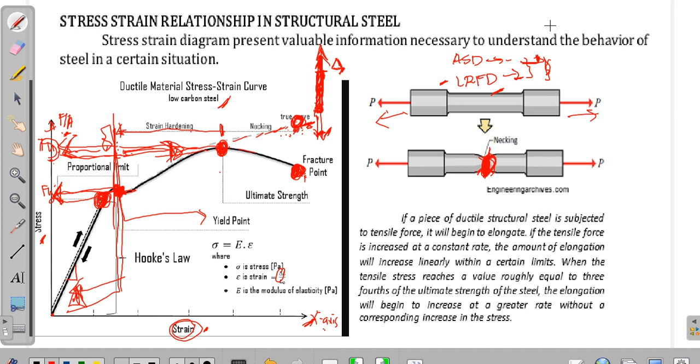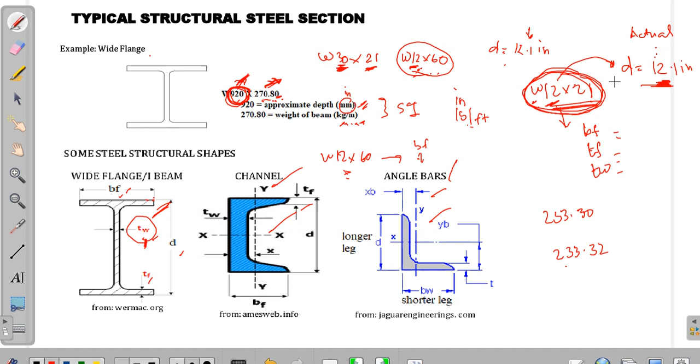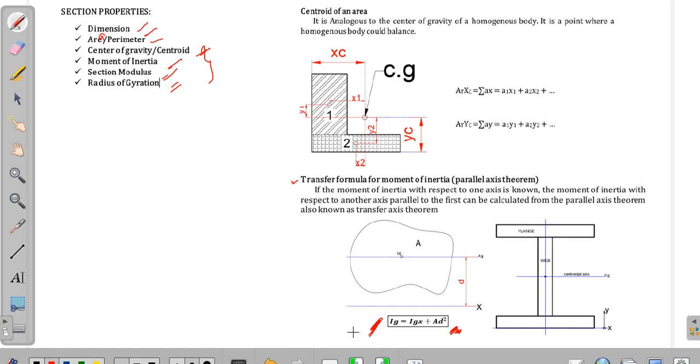Ito yung transfer formula natin, gagamitin natin yan to transfer yung ating centroid, especially if we have a build-up section. O moment of inertia, and radius of gyration, polar moment of inertia. At ang mga importante ito na properties ng steel, since gagamitin natin yan in the analysis later on for the steel section. So I hope that you have read the given properties ng steel doon sa module ninyo. I also have attached yung mga formulas.

So kindly memorize them. Yung radius of gyration, that is the square root of Ix over A. So memorize din nyo yan by heart, since palagi nyong gagamitin yan yung mga properties ng steel. So dapat alam nyo ito. Memorize the formulas by heart. Hindi dapat nakakalimutan ito, kasi this is the basic formulas ng design and the analysis. Palagi nyo itong gagamitin.

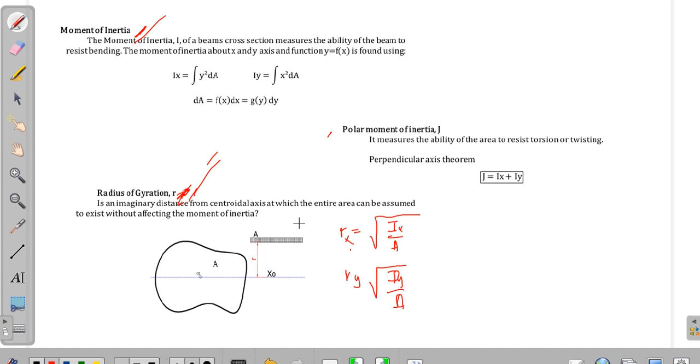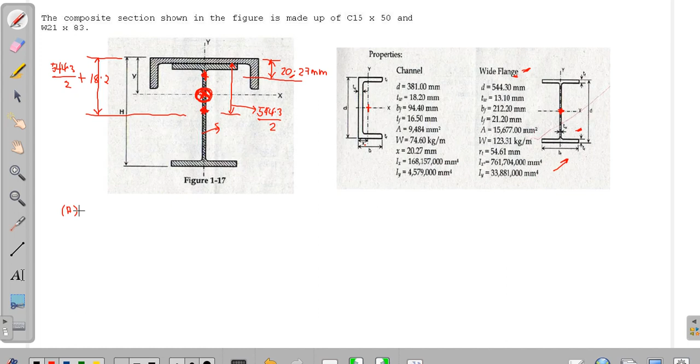To solve for the properties of the steel section, we need to start with the total area of the build-up section. This is a combination of the channel and the wide flange, with given properties for both. So the total area is simply the area of the wide flange plus the area of the channel section.

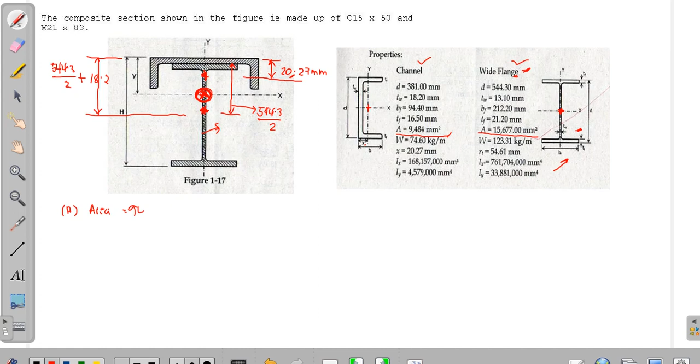We have 9484 as the area of the channel, and the area of the wide flange is 15,677. So the resulting value is 25,161 mm squared. That will be the total area of the whole build-up section.

So, next is to solve for the centroid, the location of the centroid, yung X bar and yung Y bar natin. Okay? So, as you can see in our build-up section, the centroid of the channel and the wide flange coincides along dito sa ating vertical axis. So pag tinitignan natin ito ang diagram natin, andito yung centroid ng channel, andito yung centroid ng wide flange. This coincides dito sa ating vertical axis. So in short, our build-up section is symmetrical about y-axis.

Okay? So with that, we could assume na yung global y-axis, yung centroid natin, will be aligned with this y-axis. So ano yung magiging value ng x bar natin? So yung x bar natin is equal to 0 because our centroid is symmetry about y-axis.

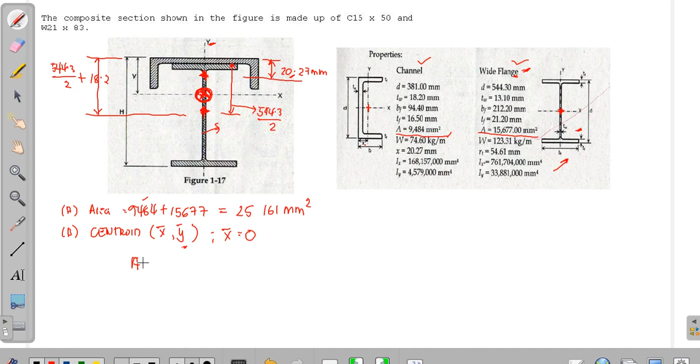So, yung isosolve na lang natin dito is yung ating value for the y bar. Okay, so to solve for the value of y bar, gagamitin natin yung Varignon's theorem wherein yung total area, the total area times the centroid, yung y bar natin of the whole build-up section is equal to the summation of the area of each individual section.

So, this is equal to the area times y of our wide flange plus the area times y of our centroid, a channel. Okay? So, for the total area, meron na tayong total area. Ang hinahanap natin dito is y bar. So, our total area is 25,161, y bar is equal to the summation of area times the centroid of each individual section.

So, unahin natin yung wide flange. Area niya is 15677. So, ano yung y natin? Yan yung location ng centroid nung ating wide flange dito sa ating build-up section. So, ano yung location natin dyan? We have 544.3 over 2 plus 18.2. So, yan yung sa wide flange. So, ito yan. Itong distance.

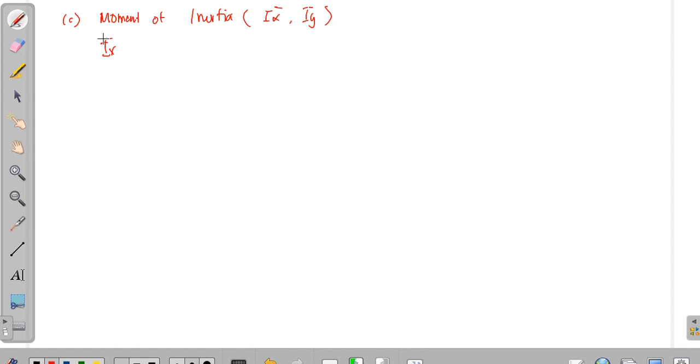So for the moment of inertia, let's start with the global moment of inertia, Ix, with respect to X. So dito, gagamit tayo ng transfer formula. Yung transfer formula natin, which is the summation of Ix plus AD squared. Since yung centroid ng build-up section, so pagka tinignan natin ulit ito, yung ating diagram, yung ating figure. Ito yung centroid ng buong section.

Ito lang yung centroid ng C-section, andito. Tapos andito yung centroid ng wide flange. So, gagamit tayo ng transfer formula dito. Okay? So, ita-transfer natin yan from our individual centroid papunta doon sa ating global centroid. Pati ito, ita-transfer natin yan dito sa ating global centroidal.

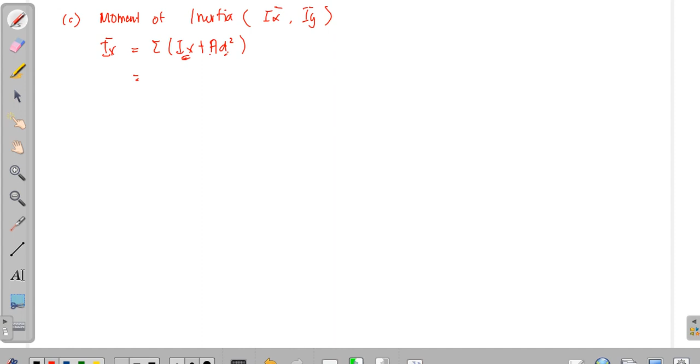So that will be the summation of Ix. Etong Ix natin dito is the moment of inertia of our individual section. Ang hinahanap natin is the moment of inertia of our build-up section. Plus area times the distance squared. So ito yung equation natin for the transfer formula. So that is equal to the Ix plus AD square ng ating wide flange plus yung Ix plus AD squared nung ating C channel. Okay?

So for our wide flange, given yung Ix natin, yan natin yung Ix natin, which is 761, ito yung Ix natin for the wide flange. So plus yung area natin, ito yung area natin, 15,677, times yung distance. Ano yung magiging distance natin? Yung D squared.

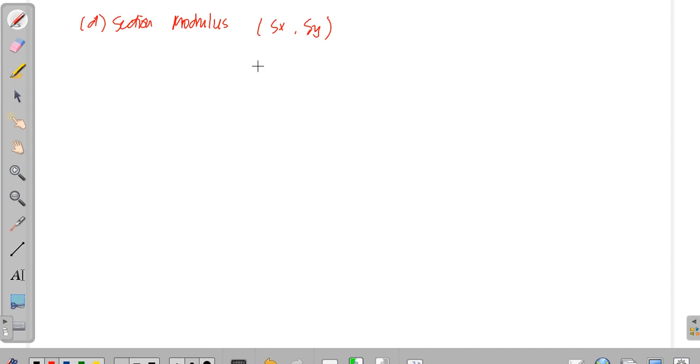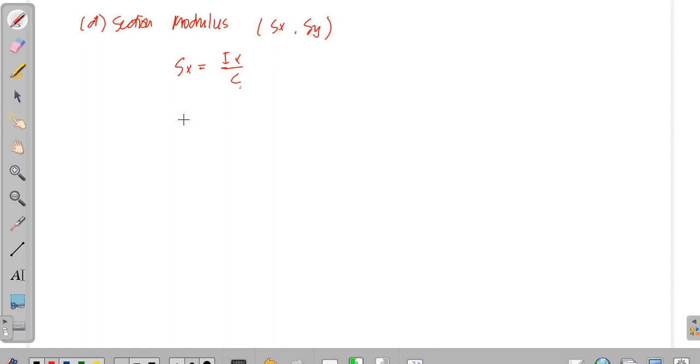Next property is the section modulus, our D. So for our section modulus, Sx for our global and Sy. So ano yung equation ng section modulus natin? Section modulus with respect to x is equal to Ix over C. Yung C natin is the farthest distance doon sa centroid. Pag sa x-axis, sa x, and sa y, y. And for the section modulus about y-axis, that is the moment of inertia about y, the build-up section, over Cy.

Etong Ix and Iy, na-solve natin yan kanina, meron na tayong values. Ang problema natin dito for the section modulus is the value of Cx. Ano yung value ng Cx natin sa with respect to x? Farthest distance. So balik tayo dito.

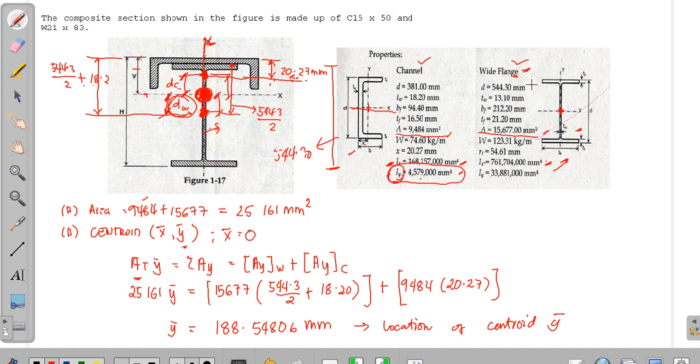So etong buong ito, yung buong depth ng wide flange, ang value niya is 544.3. Ito yun, yung buong depth niya is 544.3. Plus yung thickness ng web nung C-section natin, which is thickness of web, 18.2. So yung buong build-up section natin, yung buong depth ng build-up section natin is 544.3 plus 18.2. Yung C natin is farthest distance mula dito sa ating centroid.

Sa outer fiber ng ating build-up, pagka tinitignan ninyo ito, mas malapit siya sa top. So ang kukunin yung C natin for with respect to x-axis is this value. So ito yung magiging Cx natin. Paano natin kunin yan? Paano natin kunin yung Cx? Pagka tinitignan natin yung diagram natin, yung buong depth, 544.3 plus 18.2, minus yung y bar natin, yung distance na y bar, makukuha natin yung value ng Cx. That is with respect to the x-axis.

So paano naman yung Cy? Yung C, pagka Cy with respect to yung ating y-axis, ito yung y-axis natin. Farthest distance, so since parehas yan, ito yung value ng Cy natin. Paano kunin yung value ng Cy natin? Just have to divide the depth nung channel natin, makukuha natin yung Cy. Yung depth ng channel natin, 381, divide niyo lang ng 2 yan. Since parehas ito, andito din, nasa y-axis din yung centroid natin. So 381 over 2, yan yung magiging value natin for Cy.

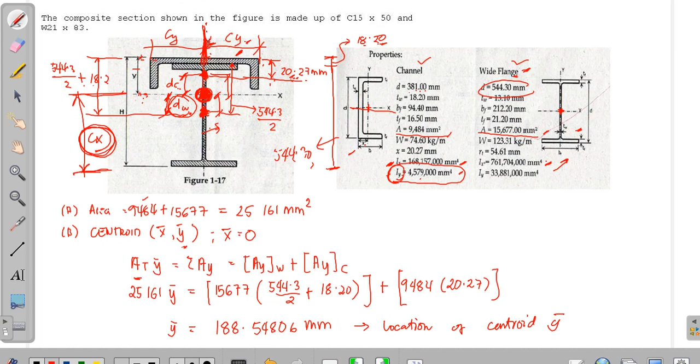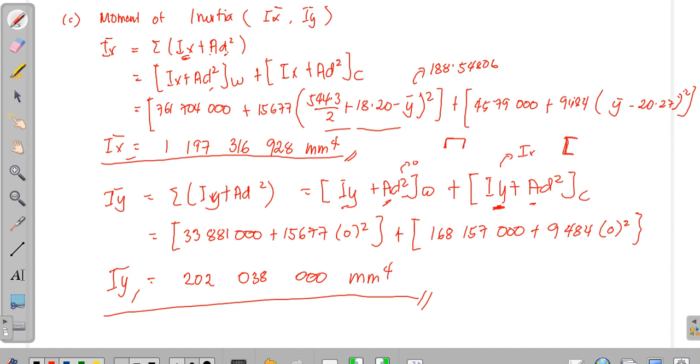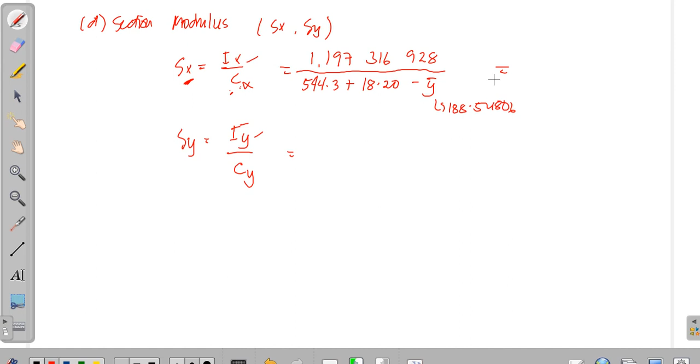For the value of Ix, yung na-solve natin kanina, ito yung value ng Ix natin for the build-up section, and ito yung value natin for Iy. So direct substitution lang yung gagawin natin for the section modulus. For the Sx, yung Ix natin is 1,197,316,928. Ano yung Cx natin? Kanina sabi ko, yung depth, yung total depth natin is 544.3 plus yung thickness ng web, 18.2. So i-minus natin yung value ng y bar, which is equal to 188.54806. Ano yung magiging value natin ng Sx? Section modulus with respect to x-axis is equal to 3,201,793.599 mm cube. This is mm to the fourth power over mm, magiging mm cube.

So for Sy, ang Iy natin, yung na-solve natin na Iy is 202,038,000, this is mm to the fourth, over yung Cy natin is 381 over 2. Anong magiging value natin dito? This is in mm, so magiging mm to the third power. So 1,060,566.929 mm to the third. Kindly check, my calculation is correct. So ito na yung magiging section modulus natin for Sx and for Sy with respect to y-axis.

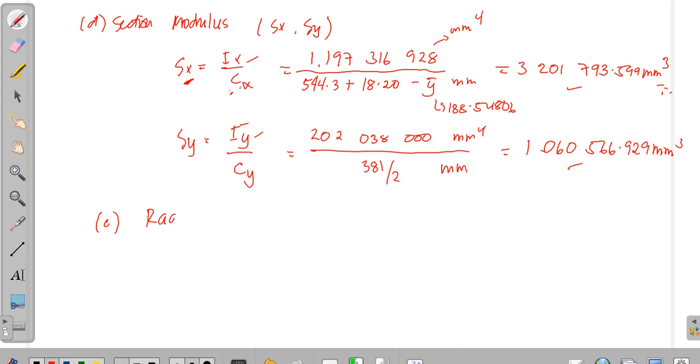And lastly, for the properties, yung radius of gyration. So pagka meron ka ng moment of inertia and area total, mabilis mo nang kunin yung radius of gyration, yung Rx and Ry nung built-up section, nung full section, since Rx and Ry of the individual properties ng section is given sa manual. So ito ang kukunin natin is yung sa built-up, yung sa global. Section modulus, ang radius of gyration natin is equal to the square root of the moment of inertia over area total. So yung Rx natin is Ix over area total, and yung Ry natin is the square root of Iy over area total.

So you just have to substitute the values na solve natin, yung Ix ng buong section ito, total ng buong section. So substituting yung values natin, ang Rx natin is 218.14 mm and our Ry is 89.61 mm. So this would be now our radius of gyration with respect to x and with respect to y. So yan yung mga properties ng steel.